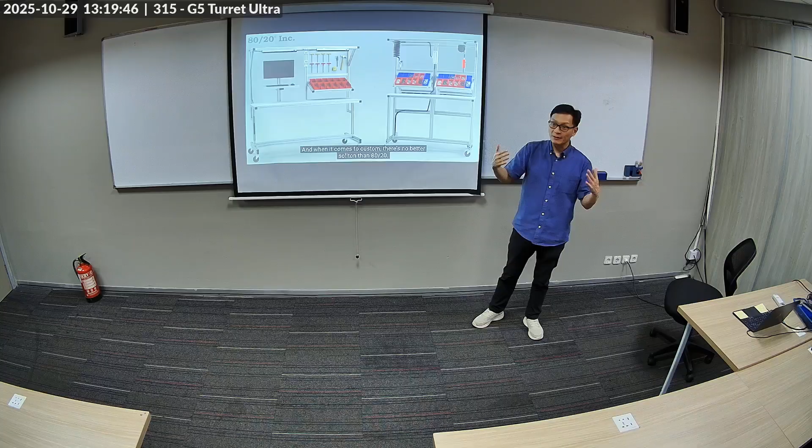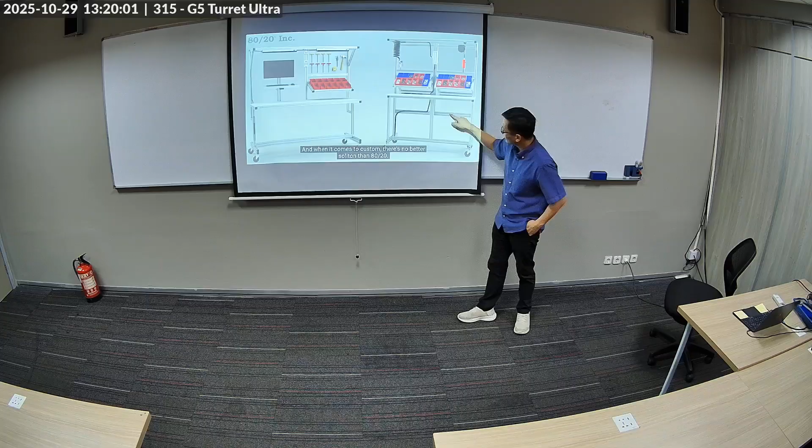So any machine that you make has to have a frame, right? It has to have legs. How are you going to mount the sensors? And these are called flexible because there are slots here that you can mount anything onto. Sensors, motors, right?

Today, we're going to take a look at one of our more popular user solutions, the custom workstation. Now, the right workstation not only increases productivity, but it reduces... a workstation...

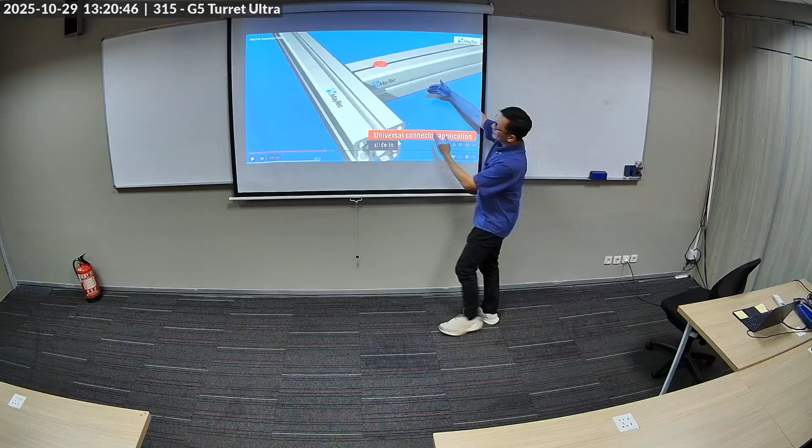So these are just different connectors, you see. This is the connection method where you have a bolt coming from this side and a cam coming from this side, and then you lock it in place. So there are different ways to connect two pieces together.

But let's look at the typical ones. We looked at many of these, and at the trade show you also see a lot of these. You might not pay attention because they might be invisible, but all these are flexible framing aluminum pieces, right? So everything has legs. You have to fix everything onto something.

Now, there will be custom plates like this, where you have to adjust the roller, for example. This is a conveyor belt, and to tension it, you loosen the bolt, pull it out, tighten it again, and the belt becomes tightened. You'll have plates here and there, but the main structure, the main frame, the backbone, is these aluminum systems.

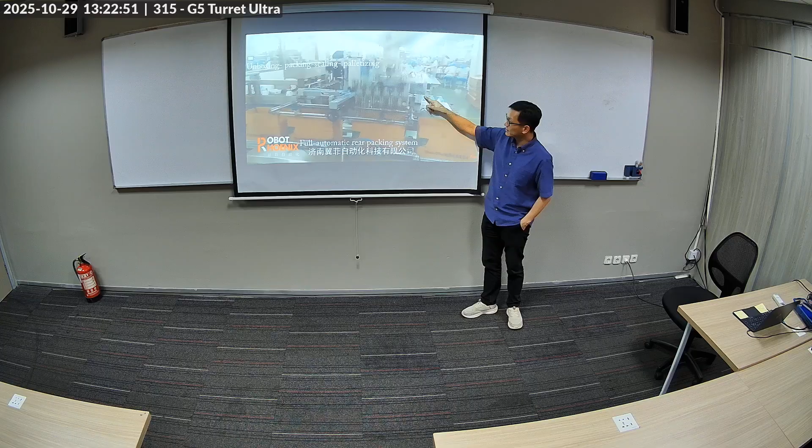There were also a lot of delta robots. We saw quite a few, right? I saw a pretty big one. And the end effector has a jig that can adjust, something like this. So everywhere, look at the legs, look at how everything is held together, and they're all aluminum flexible frames.

Now what I want to show you is the different joining options. Welcome to T-Slots. Today, we will be talking about our fastener options, the benefits they offer you, and how to know which one will best suit your application.

Okay, let me ask you before he tells you the different styles. Which one do you think is the strongest? Third one from the right. Third from the right. It's the fourth from the left. This one? No. The third one from the left.

Well, the answer is it depends, right? What kind of load are you seeing? Generally speaking, this will be the strongest. Under general loading, if you twist it or bend it, this will be one of the strongest. It's also expensive because of that thick aluminum, that many holes, and you have to tighten more bolts. But generally, this is one of the strongest, followed by this one.

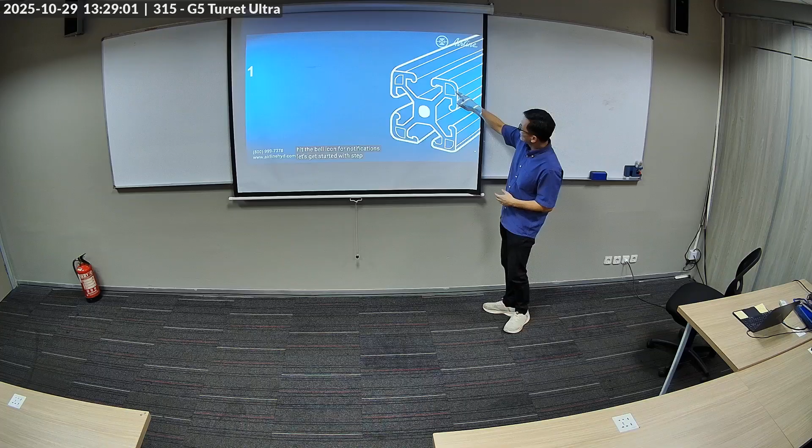Let's get started with step 1, design. Many engineers get started with step... So, let me highlight a few features here. This is the cross section of the tube, right, or the piece. This profile is for the head of the screw. So the head of the screw can actually slide in here. I should have brought some samples. We do have quite a few in the workshop.

Okay. So the head of the screw can slide in here. So there is another piece perpendicular. This is a hole. You can tap it, so it has threads. And so if you imagine the other one coming from here and the head of the screw is here, then you can tighten against each other. Now, this slot can also serve for sensor mounting, any brackets really. 1. Design.

Many engineers and designers rely on Rexroth's aluminum framing as their project's material, as it simplifies design for any application without sacrificing aesthetic appeal. There's even versions of this material rated for clean rooms and medical applications.

Some engineers may wish to use their own software for design. This method may be preferred for some architectural applications. But for the planning of most framing systems, we recommend using Rexroth's MT Pro or MT Pro Lite. These softwares include Rexroth's Layout Designer, with which you can virtually assemble the framing project in a 3D scene, with or without generating a CAD model.

With MT Pro, you can also access product information, and find the exact framing profiles, lengths, finishes, and accessories needed.

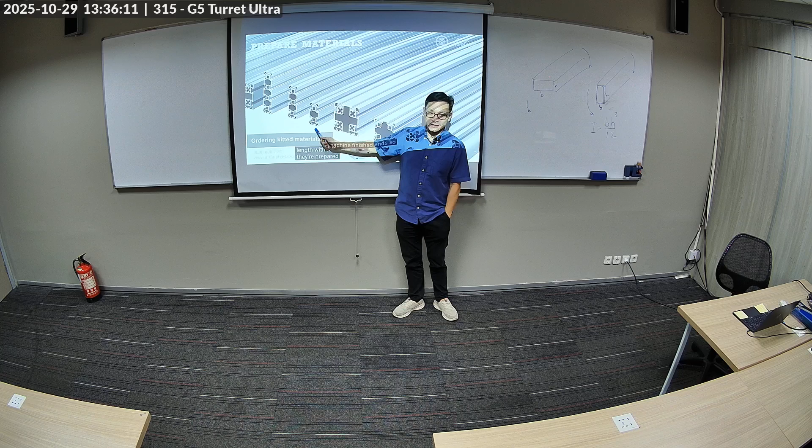Now I can always go bigger in all directions, but why would I do this instead of this? This one also has a big area moment of inertia, right? So why not just make it bigger in all sides? Why only make it bigger this way? Cost, weight, practicality, space. So yeah, you can always go bigger and be stronger, but why?

It's also the same reason why they make it hollow. Do you know why they make it hollow? If you look at your canopy for a carport in the house, the frames are called holo. Of course, they meant hollow, but in Indonesia they call it hollow, H-O-L-O.

Now, these frames, they are actually like this, right? Now why do this instead of a solid one? Lightweight. The center doesn't carry much load, it doesn't bend as much.

No, I mean a solid one, same size, same cross section, but one is hollow, one is solid. What do you think is the stiffness of this versus this?

So this guy can be 70 to 75% as stiff as this one, but the weight is like 50% of this guy. Get it? So what you want is called strength to weight ratio. Yes, I do want strength, I do want stiffness, but what is this material doing here? It's not doing anything.

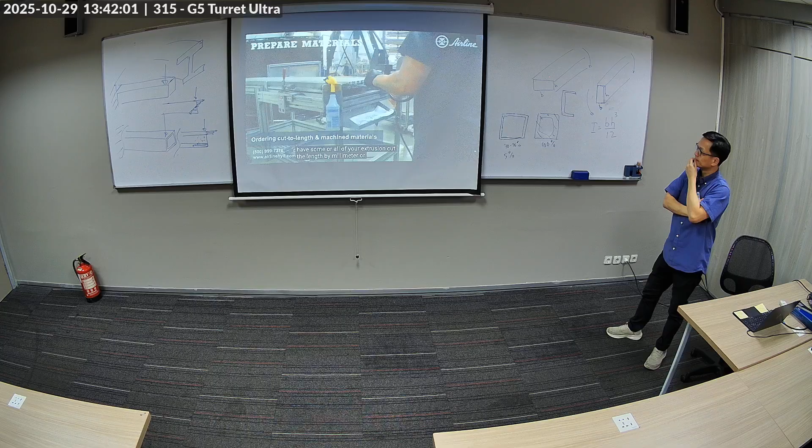Everything for the project arrives ready for assembly. Instead of getting a full kit, you can choose to have some or all of your extrusion cut to length by the millimeter, or choose machine end finishes including custom hole drilling, thread tapping, miter cutting, milling and more. You can also order unmodified aluminum extrusion in its full length, either as a bundle or by the stick. They will arrive in their original length without end finishing, so you'll need to provide your team a list of lengths and machine end finishes to fabricate themselves.

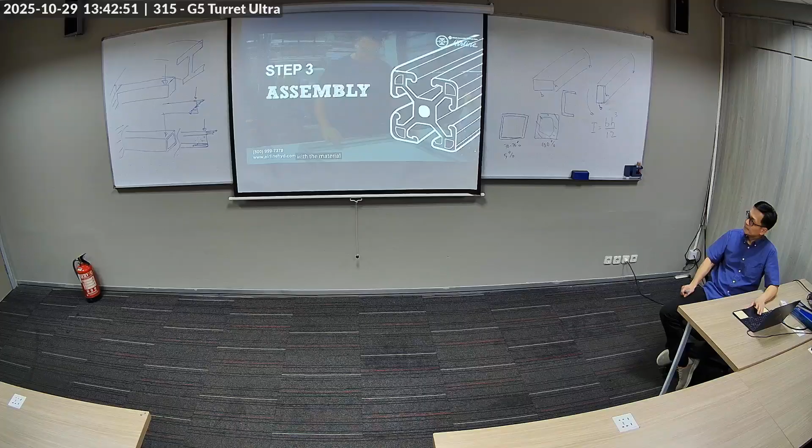With the materials sourced and prepared, you're ready for assembly. Many assemblers enjoy working with Rexroth's aluminum framing because projects can be built quickly and easily. The framing has a T-slot design, so it's bolted together. This is what I talked about, the head of the bolt going to the slot instead of being welded, nailed, or permanently fixed. You drill on the other side for access for the tool.

This provides fast assembly, easy reconfiguration, and in the future the ability to reuse materials for other projects. It also lets assemblers pre-assemble the project in one location, break it down, and reassemble it at the final site. This is helpful for complex builds, like large work cells and automated manufacturing lines. Other projects, like safety enclosures, displays, carts, architectural applications, and others can be built and shipped as needed. At Airline, we can pre-build the project in our large facilities to make sure everything's perfect.

So you can have these cages, right, safety enclosures, simple plastic plates.

Once built, we thoroughly inspect the project through our quality department and provide virtual or in-person inspections for the customer. We can also include accessories for lighting, sensors, conveyors, customized shelving, and more. We can then ship the project, or we can travel to your location to install the framing system.

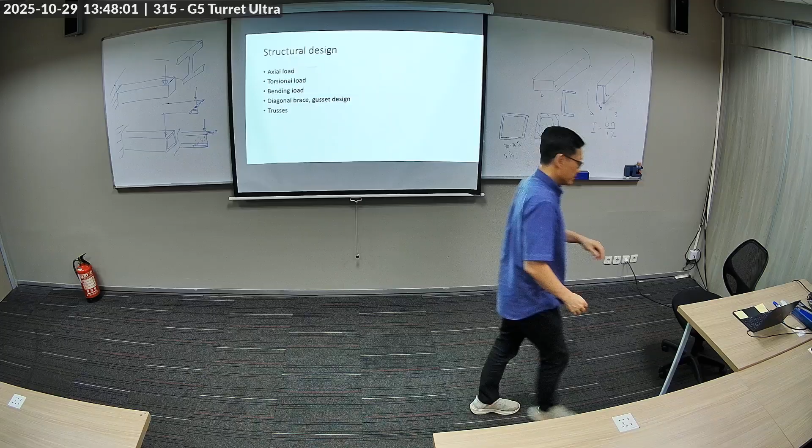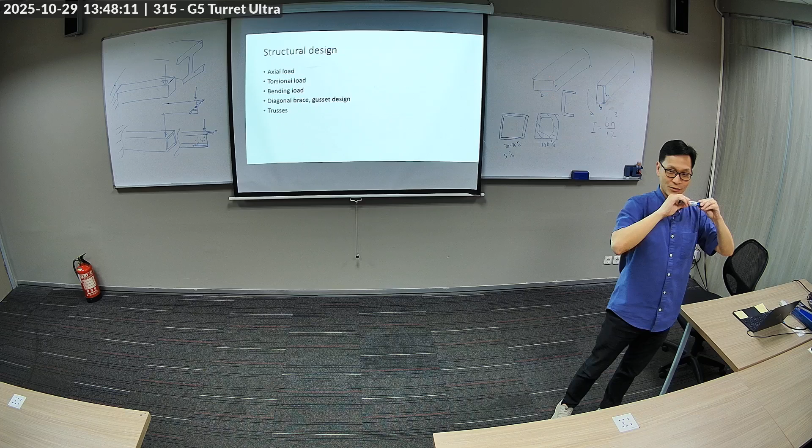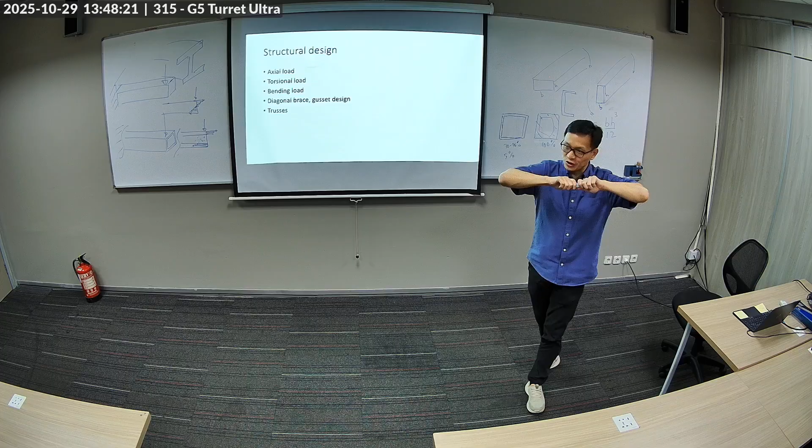So, what is an axial load like on this piece? Axial is - which one? Axial is through, you just pull it, right? If I do this, this is tension, and if I push this way, it's compression.

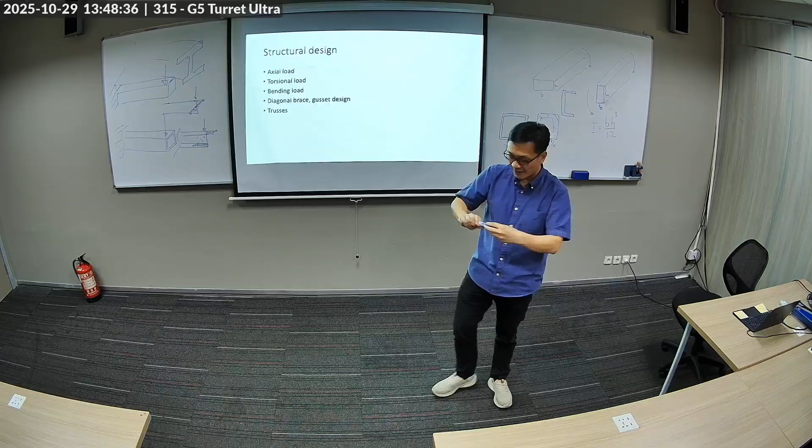That's axial load. Torsional load is twisting, right? This is torsion - like if it's a drive axle, driving a car, there's an axle that will twist your wheel, right? Bending, like this.

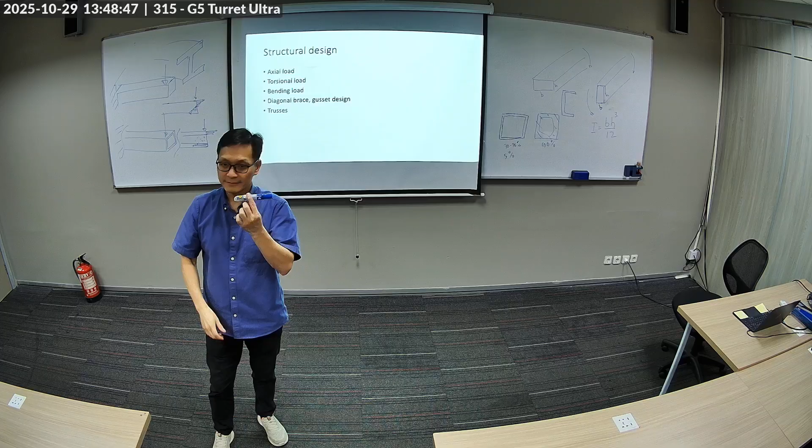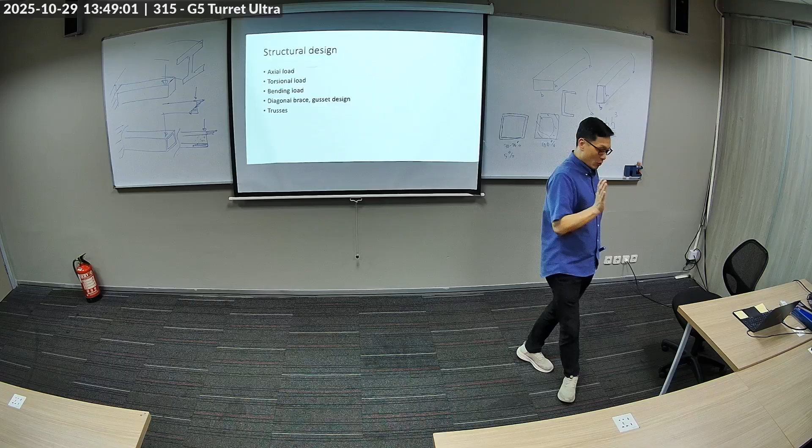If you want to break this piece, how would you do it? Axial, torsion, or bending? Bending. So, in general, bending is one of the hardest, or the loading you want to worry about the most.

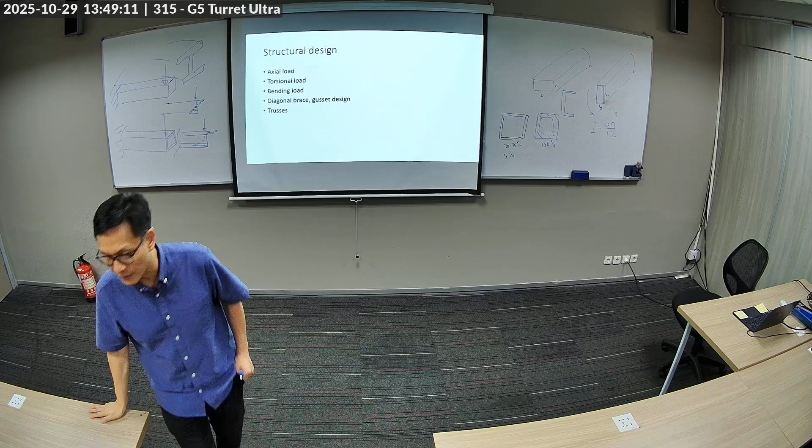If you sit on this table, what kind of load do you worry about? Which components do you think will fail? You sit on this - bending on which one? This part, right? Why not worry about the compression on the legs?

Torsion? There is not much torsion going on, I guess. When you sit on this, it's being bent, and this is thin - they might try to make it thick, but this is relatively thin. It is also helped by this vertical plate down there, like your kick plates, right? That also helps because it's vertical, remember? If you don't have that, this is gonna bend in no time, it's gonna break, okay?

So you don't worry about the axial compression here, you worry about the bending this way. It also, if I press on this way, by the way - if I press on this, there is also some bending here, right? But you've got the support there, kan? Yeah.

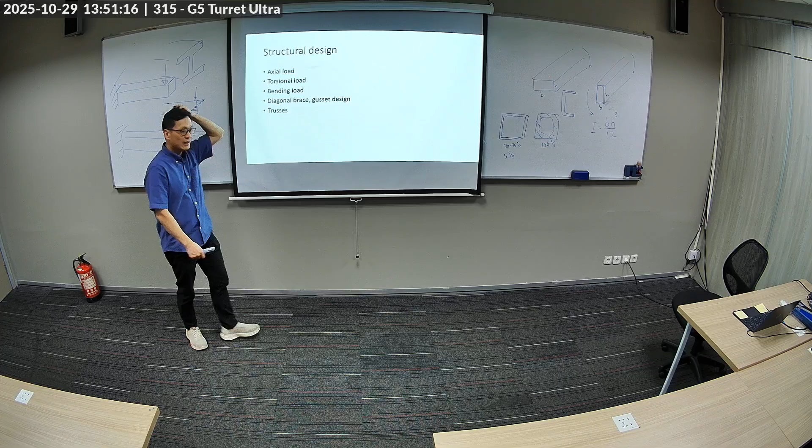Now, bending load is one of the harshest things to deal with. Torsional load - you remember how, if it is bent this way, the material farthest vertically is the one doing the work, right? In torsion...

Like when you twist this rod, again, the material doing the most work is the outer fiber. And that's why they often make it hollow also, like a pipe.

So your drive axle in the car, sometimes it's solid, but not all of them. The big tube under the truck, if you ever see the underside of a truck, right? The center shaft - it's big, right? But it's actually hollow inside.

Because again, in torsion, the material on the outer edges are doing the work. The one in the middle is not giving you much stiffness. So again, they get rid of it for weight saving.

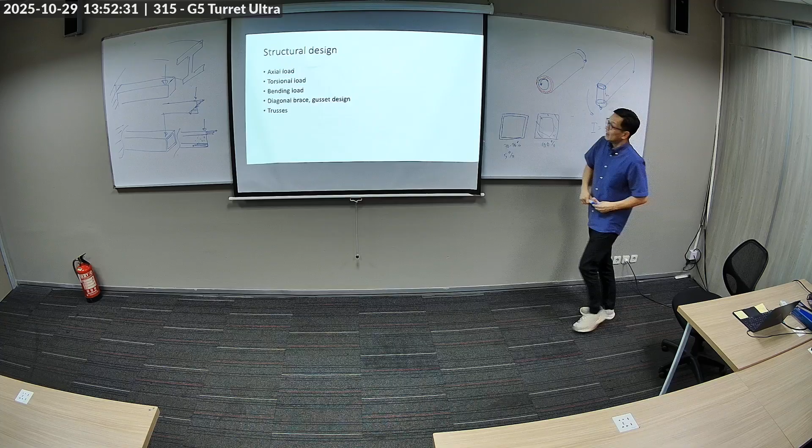So axial load, you don't worry too much. Bending load. Diagonal brace. Now, this is a unique kind of loading. It's called a racking load. So a racking load is like you push on the top and you pull on the bottom. So like that. Yeah. So you do that to the door.

Or let's say if I hold it on, this is a racking load. If I pull on the handle but I hold it with my foot on the bottom. Okay? This is a racking load. This is one of the most damaging kinds of loading in structures. Yeah, but oftentimes it's kind of unexpected. People don't expect that a lot. Well, that is one of the weak points.

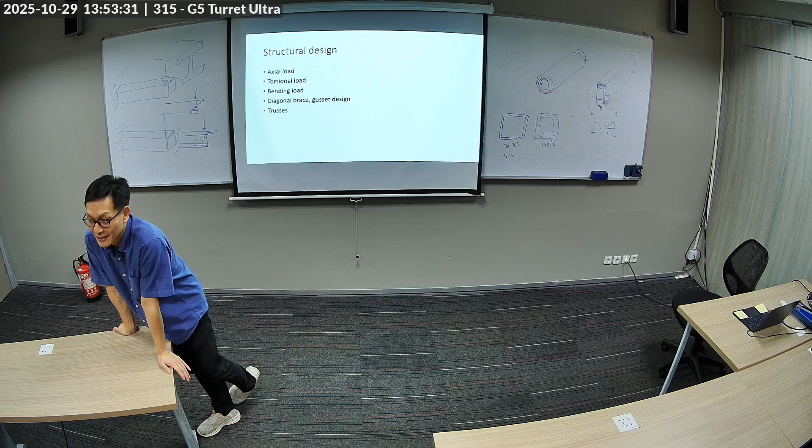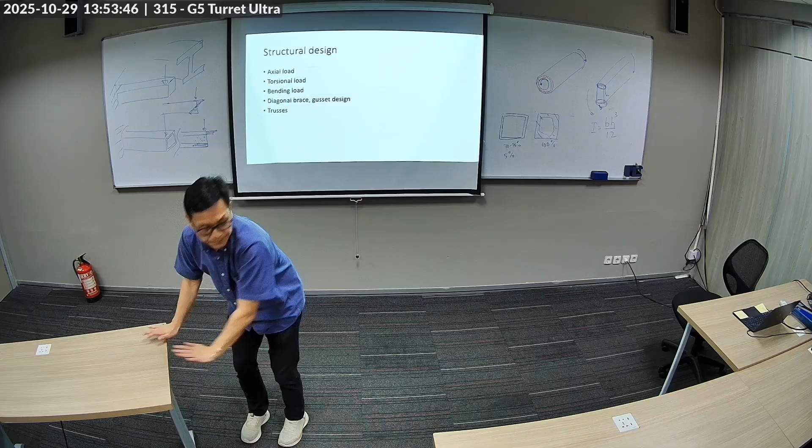So if you want to test whether a table is good or not, if you go to IKEA to get your workbench, don't try to push down only. Do this, right? So the bottom is constrained. I mean, there is the carpet, and then you push on the top. So that kind of loading determines a lot of the performance in a structure.

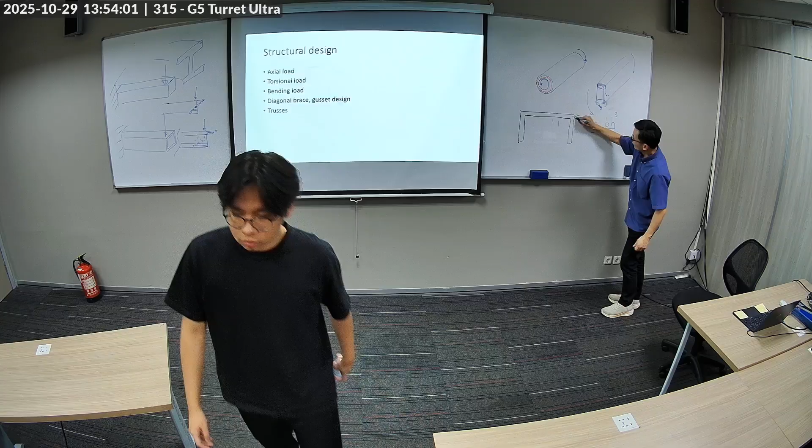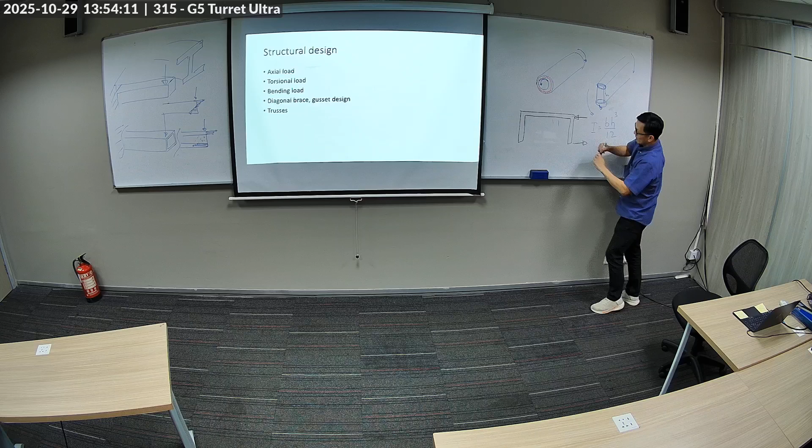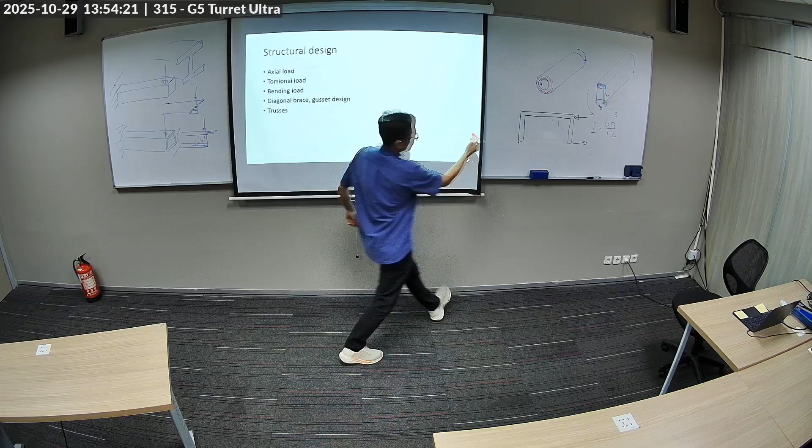So if this is the table, you push on the top and the friction keeps it on the bottom like this. Okay? So this racking load will tend to make the table go like that, right? So this is the tendency of the displacement, right? Now, I'm exaggerating, of course, in the drawing. How do you prevent or how do you resist this kind of load?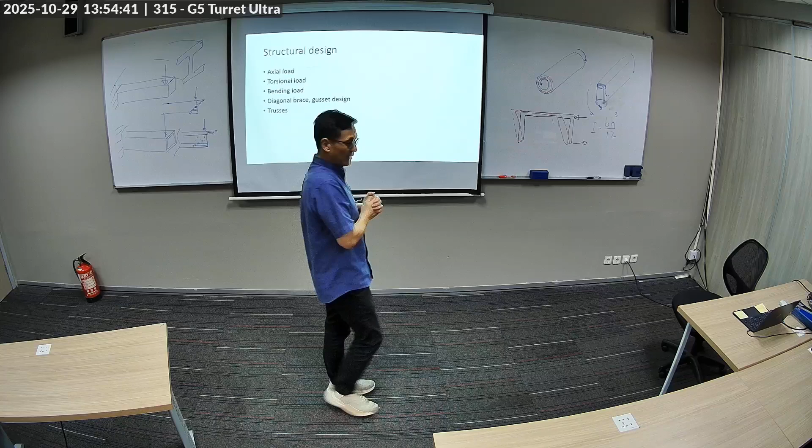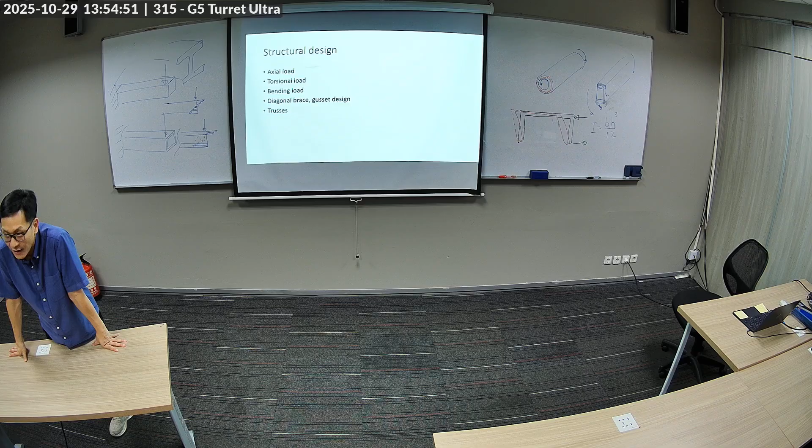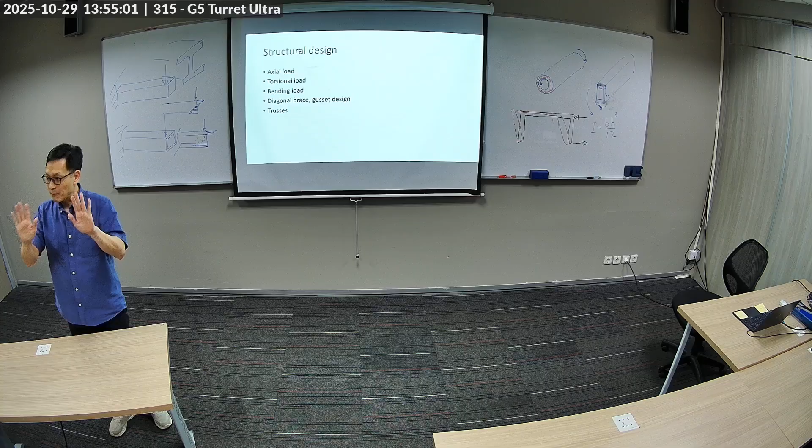Support. It's called a diagonal brace. Okay? Or, in the case of this desk, do you know what the diagonal brace is? The plate. Yes. If you ever try to assemble or disassemble your IKEA products, before you put the backplate in, it's very flimsy. So you put together a bookshelf. Okay, you put together a bookshelf. Like you put everything right, but then it wants to, right.

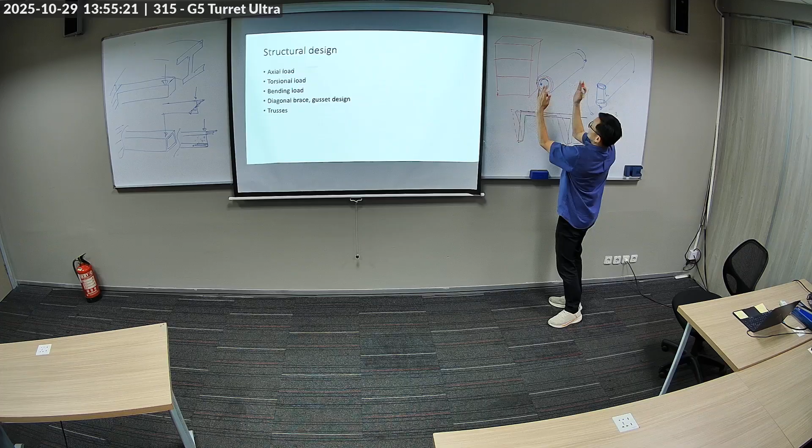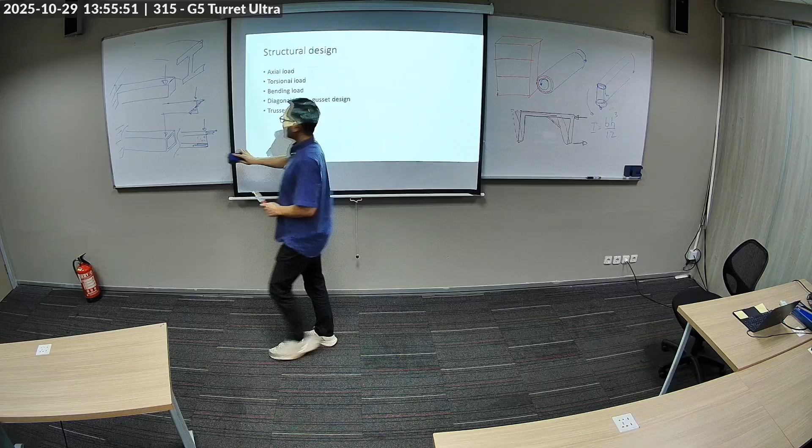It wants to become like a diamond shape until you put a thin, very flimsy actually, a thin backplate on the back. Right, just a thin, like 2 millimeter. But once you put it as the backing, suddenly it's solid. Because that backing acts like a diagonal. Okay? So, when you design structure, you need to always consider all directions of loading. Because otherwise, an unexpected loading direction will come.

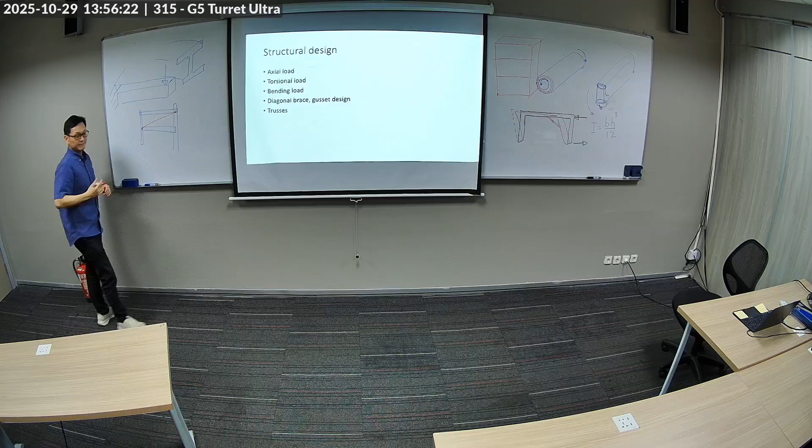So let's say you put like shelves, storage shelves. Okay? That's why many times they have, right? They have a diagonal. And if you don't have that, it's gonna rock. Scaffolding. Yes. Now, so this piece is actually a zero force member. Recall that? Zero force member. Okay? A zero force member is actually there is zero force on it, but without that piece, everything's gonna be flimsy. So it's interesting how this works.

So when you put a load this way, what's gonna happen to the red piece? How will it react? Tension or compression? Compression. You have good imagination. Okay? So you do this, it's compression. But if you do this one, it's going to be tension. So that's how the diagonal brace kind of resists this rocking or racking motion.

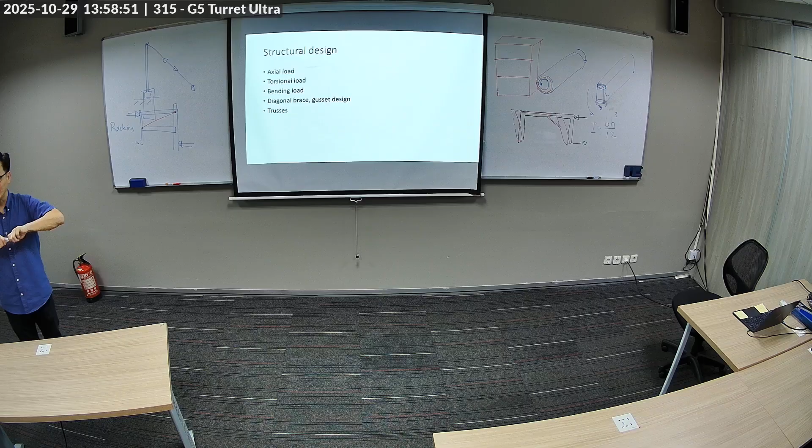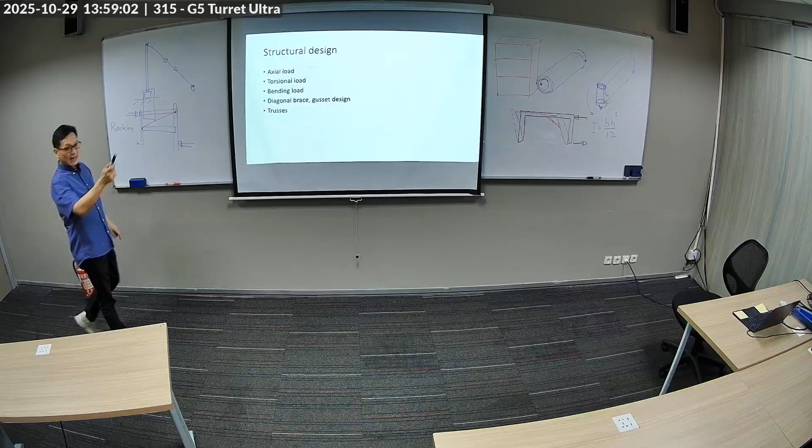But instead of having a very big and strong base, I'll just have a small base, but then I'll tie the top to a cable because this will be axial load. And axial load is easy. I mean, again, think about, you want to break something, do you bend it or do you pull it? If you need to break this using tension, it's going to take a lot of force, like 10 times the force. So, yes, axial load, diagonal brace, and also gussets.

Now, if it starts to rock this way, and this is not strong enough, what do you do? What do you do to these joints?

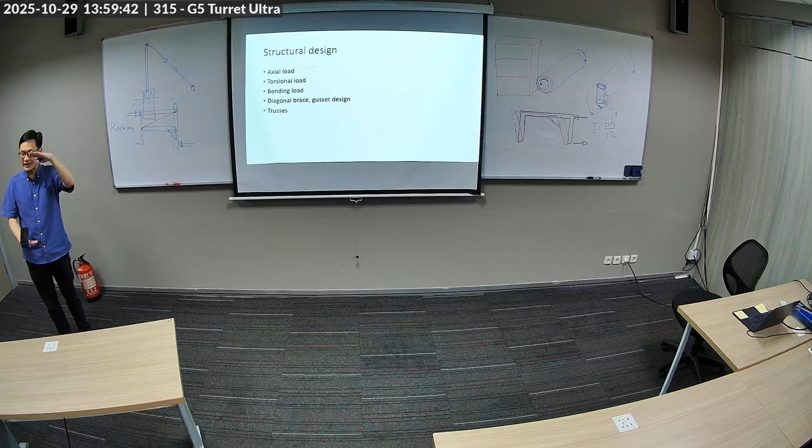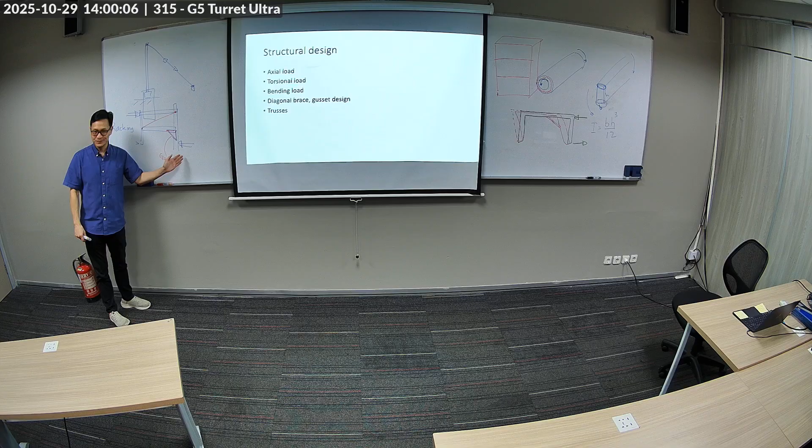That's different. In a concrete structure, you have the steel bars in the middle because concrete is not good at tension. Concrete is good in compression, but under tension it's gonna break. But what I'm talking about is called a gusset. Okay? So this piece is called a gusset. Now, a gusset is basically a diagonal brace without the annoying big piece coming across you. So if you need a structure like this, you need it clean, and you don't want any